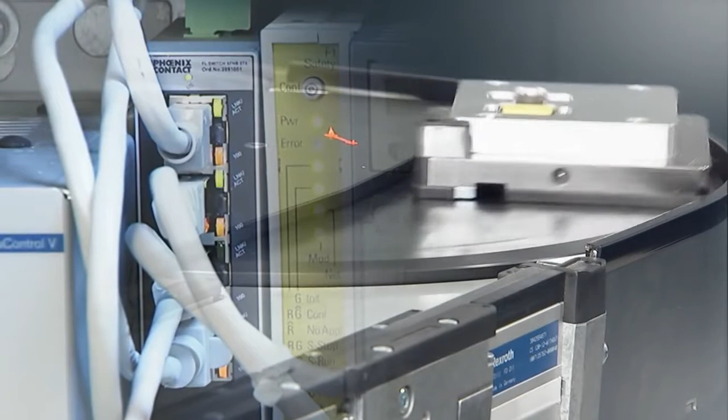But let's start at the beginning. Industry 4.0 stands for a paradigm shift. In this demonstration plant of Bosch Rexroth, the final product controls the machines by which it is produced.

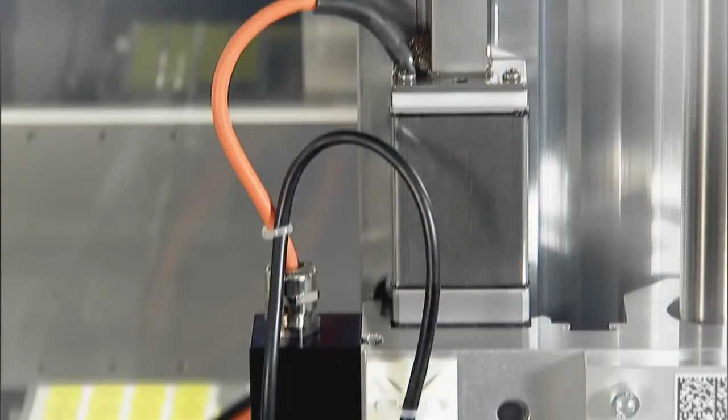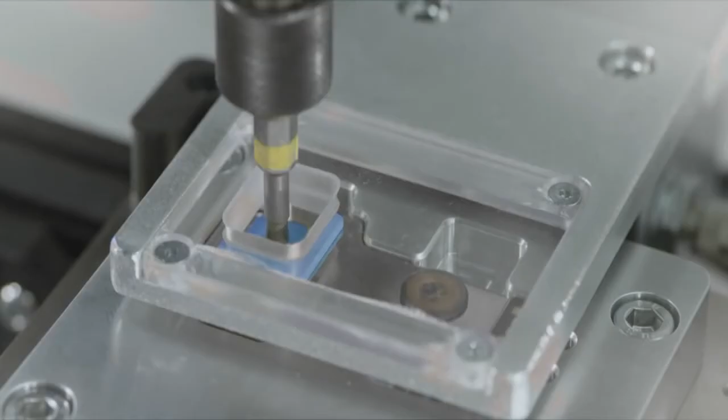The key is tagged with an RFID chip, a kind of radio transmitting label wherein all its properties are stored. It now instructs each machine what to do. That's why our key gets a yellow mark and not a blue one, as for example the key behind it. What looks simple at first glance requires highly complex controls and sensors that significantly affect the entire production.

In the Daimler-Benz plant in Rastatt, the dimension becomes clear. Here, every vehicle body is RFID tagged right from the beginning. Similarly, all details of the vehicle are stored on it, from the wheel hub to the equipment.

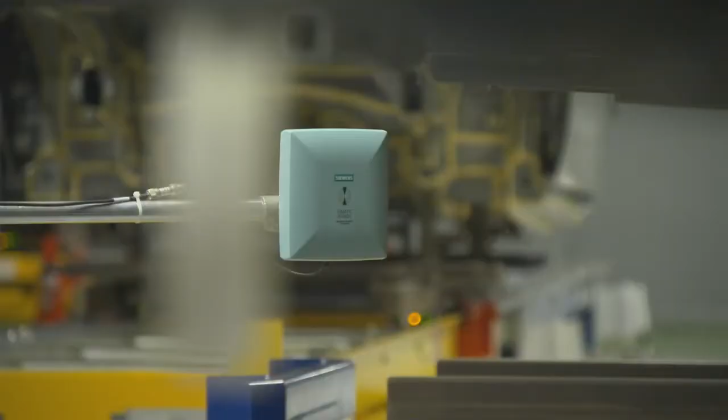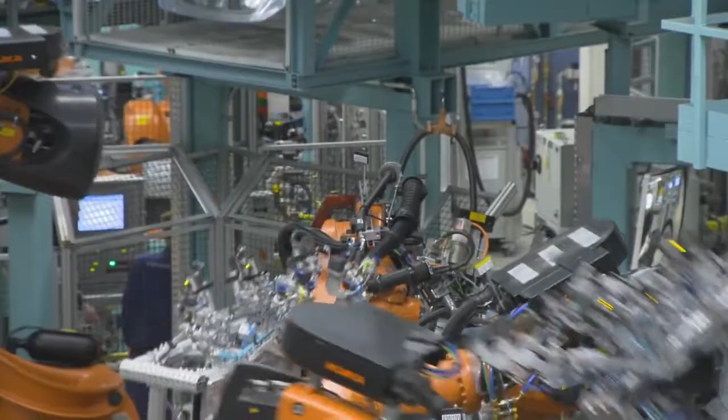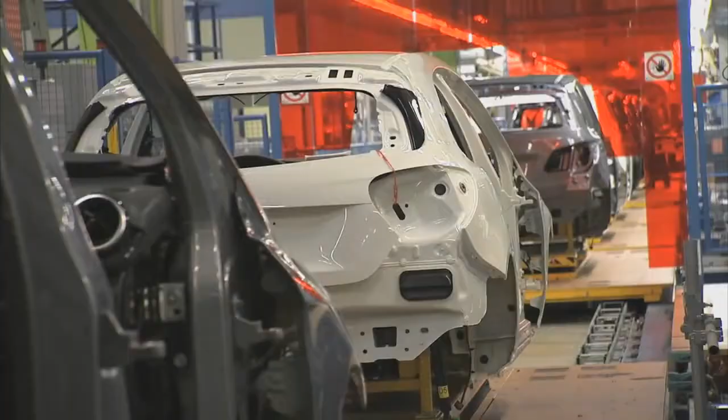Via transponders, the RFID data are queried and new data returned. The RFID tag is almost constantly updated with current information, indicating to what extent the vehicle has already been completed and what is still missing. The insignificant-looking tag has a lasting effect on the complex interaction of the gigantic production structure.

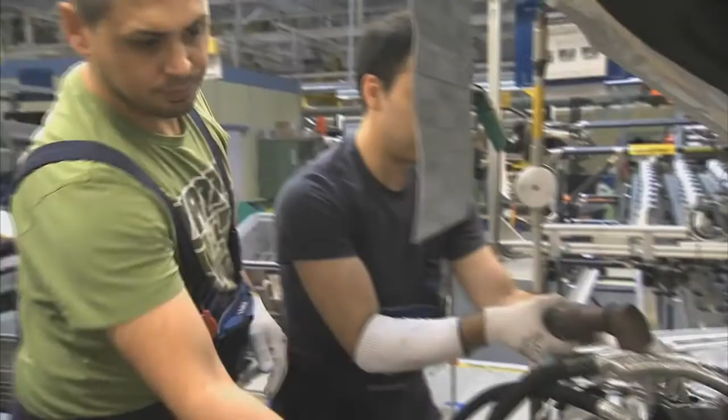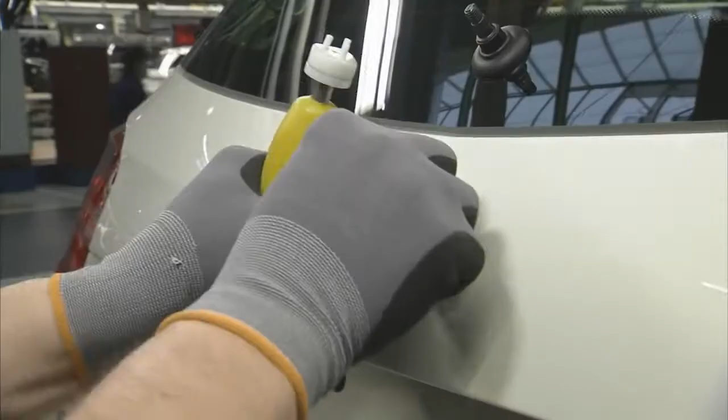It instructs the robot in the broadest sense what to do next. In an environment of 1,500 interacting automation units, where 1,200 vehicles roll off the production line every day, the significance of the information in the RFID tag will clearly be comprehensible. It enables and controls a highly productive process.

But first of all, technical hardware and software solutions had to be found before everything was able to be running smoothly.

The requirement of the customer in the workshop was a wide reader range of up to 1 meter. This is why we applied the UHF technology for the first time. However, the radio waves are greatly reflected in the highly metallic environment, leading to an impairment of the read results. We could solve this problem by developing special algorithms and integrating them into the reader devices.

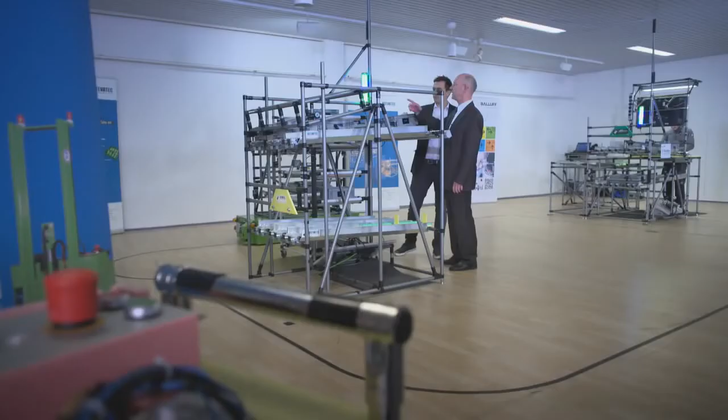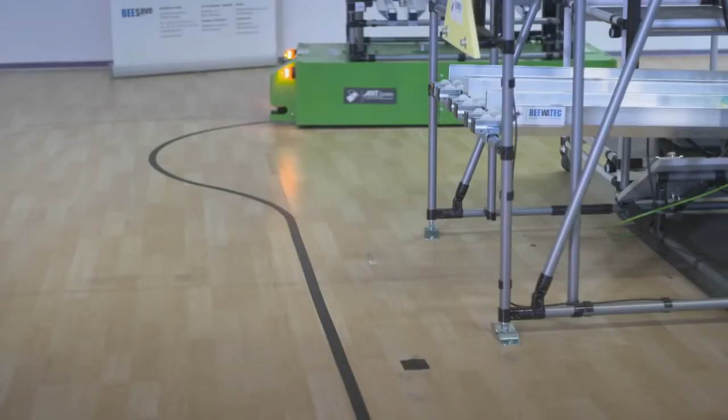But no production can function ideally when the material flow is not absolutely free from error and wrong parts creep in. Fully automatic logistics systems with driverless transport systems equipped with sensor technology provided by Balluff provide the finishing touches here.

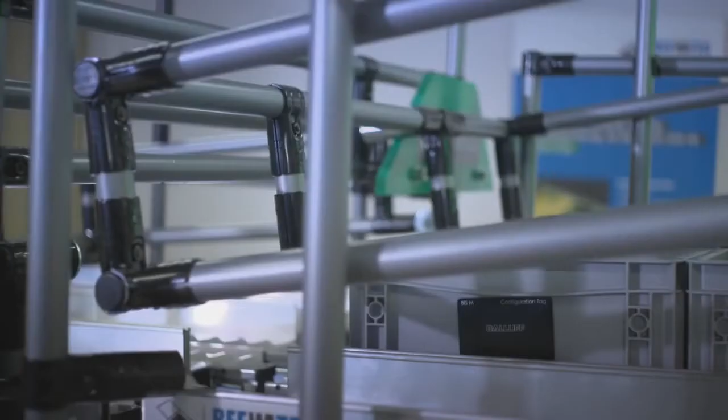The integrated sensors check each box and its contents for accuracy. Again, RFID technology is the basis.

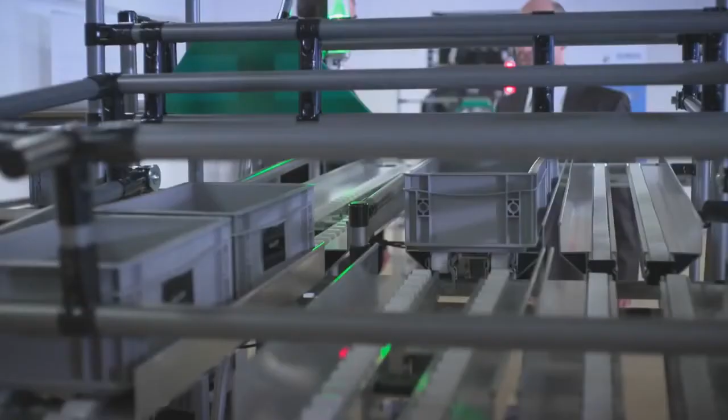In automated production, people and machines are responsible for materials replenishment. As the components sometimes are quite similar, precise control is essential. So only boxes with the right parts or components arrive at the destination, otherwise they will be stopped and a warning signal given.

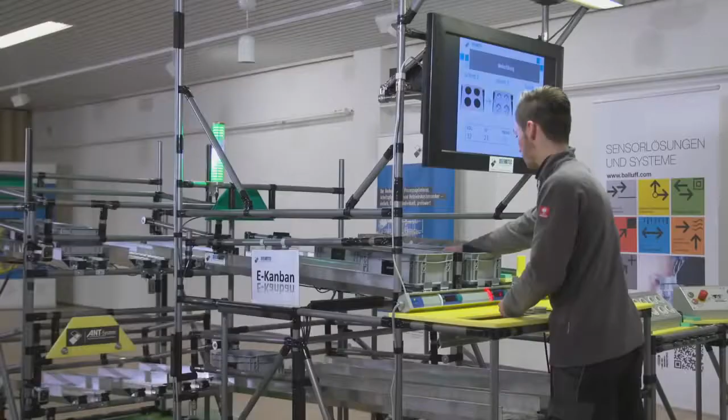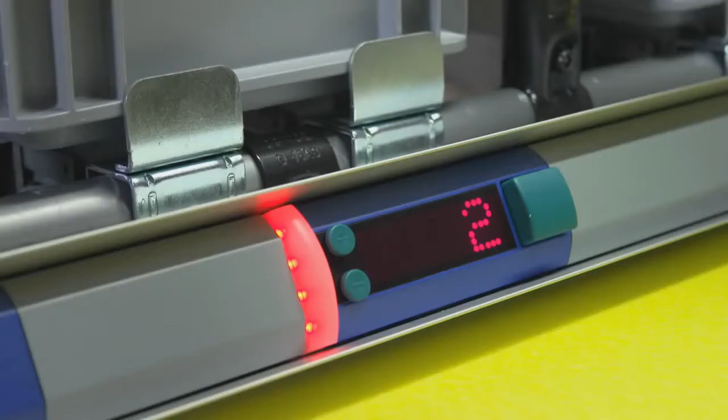It's clear that an incorrectly assembled part in a finished product is a bigger and more expensive problem than ensuring correct assembly during production.

The requirements on sensor technology, especially in the context of Industry 4.0, are that we need much more detailed information from the working environment. We must also be able to track goods, as here in this plant. And we need to combine sensor principles that record, for example, temperature or distances.

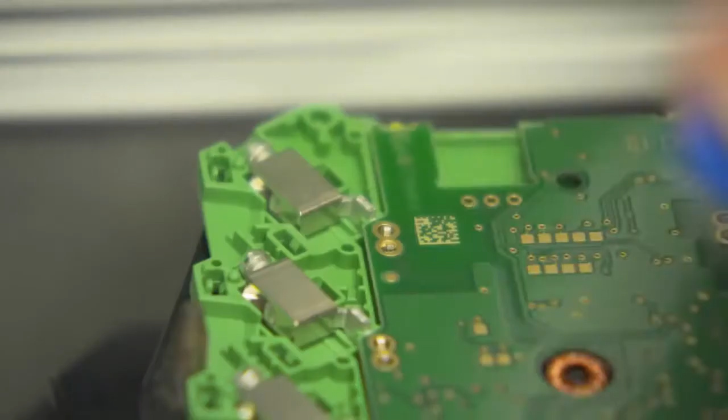At Phoenix Contact, there are RFID chips invisibly integrated that allow a flexible production of one-off items. This ensures that at hybrid working places where humans and machines collaborate, there are always appropriate product-specific instructions.

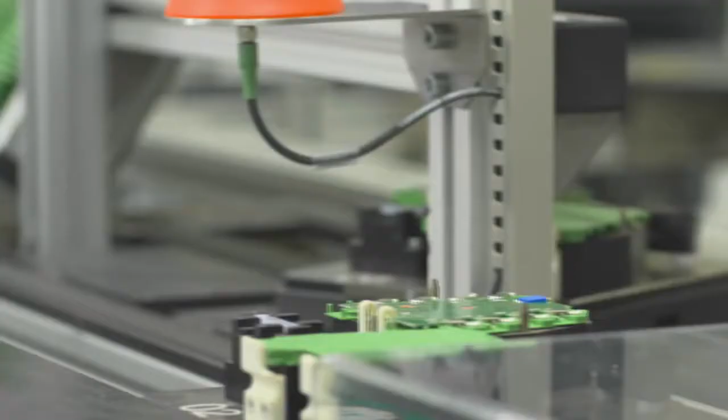Combined with intelligent control systems, complex production systems can easily be set up and configured by on-site operator teams and needn't be programmed. With these technologies, it's possible to control manufacturing processes in a situation-oriented manner and adjust them when necessary.

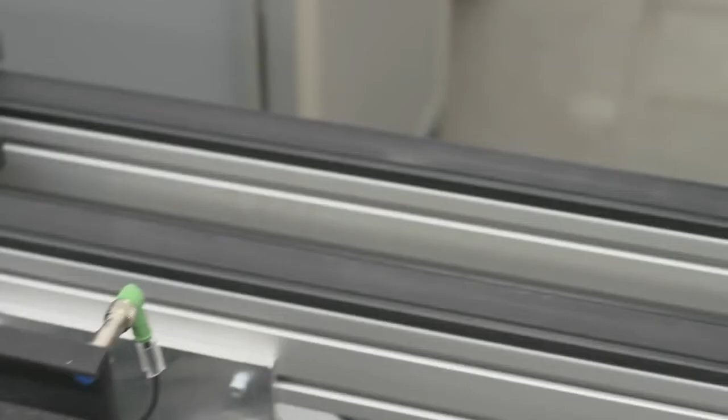The interconnection of the machines in the factory's network allows smooth communication with various IT applications in the company, meaning that production cells, such as labeling processes, can be supplied with the required information in an audit-proof manner at runtime, for example, geometry and process data.

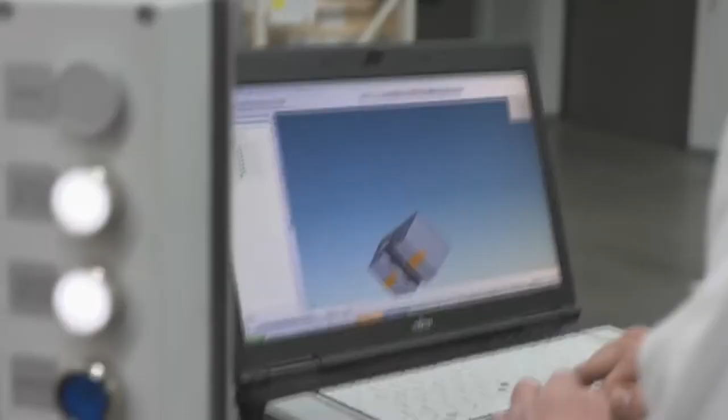This enables the production cells to individually adapt to the next product. Digital product models are used to prepare vision systems and robots during operation for the next task in hand. Industry 4.0 helps to maximize productivity with the maximum flexibility of production without overstressing staff members.

In realizing individual customized mass production, automated production plants have become more complex. The challenge is to enable operators to configure such systems instead of needing experts who program them. It's also essential that the control and IT systems display faults and malfunction information clearly enough for the operator to quickly and efficiently locate and eliminate the cause.

The interaction of hardware, software and communication plays an increasingly important role in the machine and plant construction industry. Technology that functions precisely with programmed intelligence and flawless communication in a production system can be characterized by the term Industry 4.0. In this context, intelligence means that, to a certain extent, machines make decisions, but these are monitored by people who can reverse them at any time. Principally, the final decision maker remains the operator, but secure and stable communications are an absolutely essential precondition.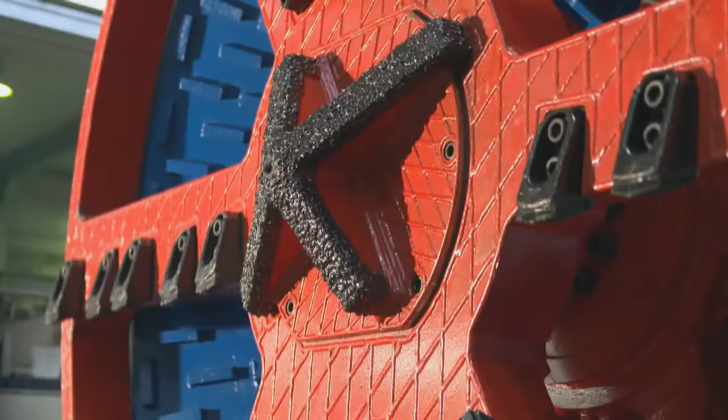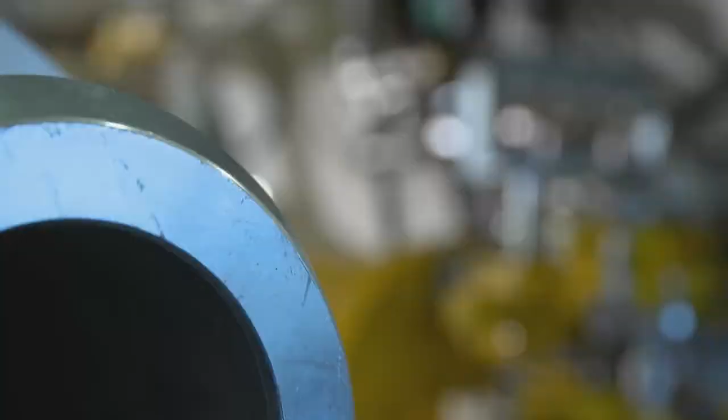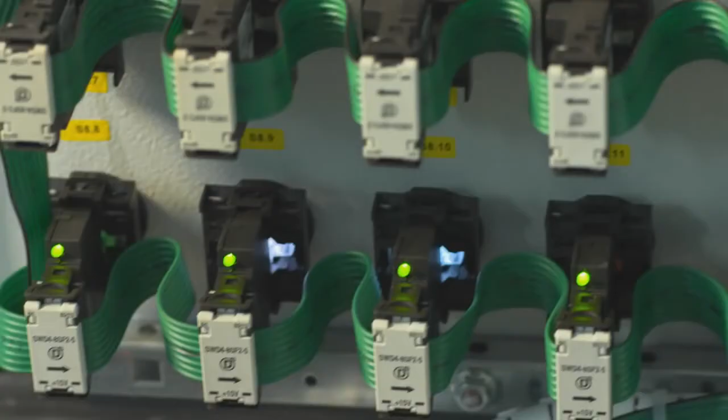For example, this tunnel boring machine from MTS Perforator works underground and independently tunnels through the ground. The design engineers understood that a machine meters under the surface is difficult to maintain. That's why they relied on not only high-quality components, but also on robust and resilient control and communication technology provided by Eaton. These smart devices allow detailed data access to the control elements from anywhere in the world, so that in case of malfunction, remote diagnostics can quickly be made and a remedy found. This ensures a high facility availability for end users. It also makes it possible to protect the machine globally from manipulation and prevent danger to users and equipment.

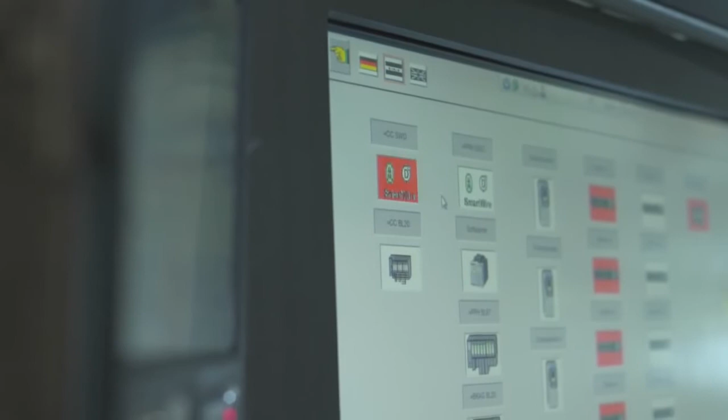That we can log on to this machine from my office workplace here means we have one communication partner here, and on the machine the corresponding communication partner is installed. After starting both programs, I can access this machine over the internet, allowing me to make a diagnosis. I can find out where the defective parts are, which ones have to be replaced. Using this information, service personnel can go directly to the machine with the necessary spare parts, or we can advise the customer on site from here, which may allow them to solve problems directly and find a remedy.

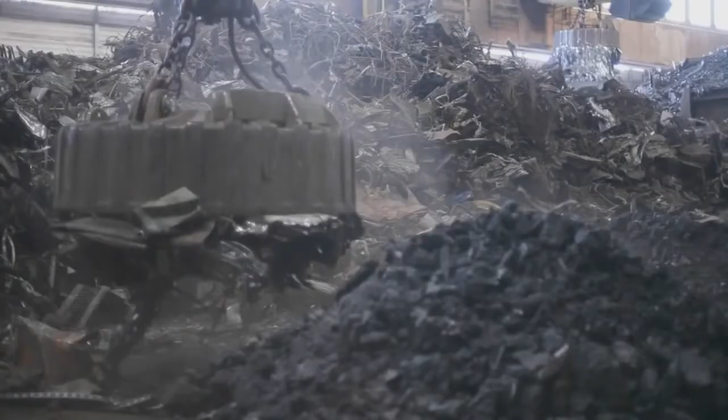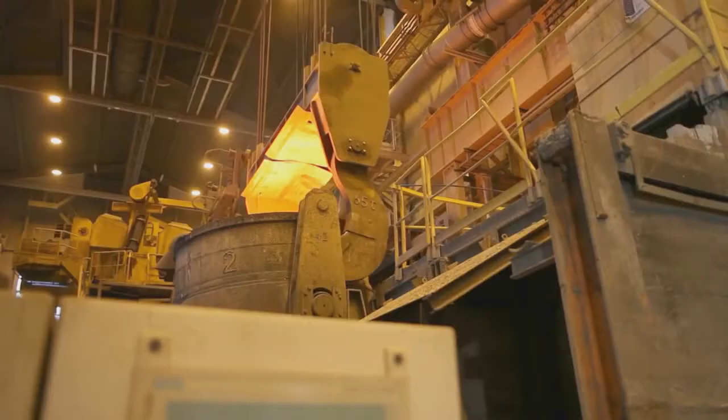In industrial processes, secure data lines are becoming increasingly important. Particularly extreme environments, such as heat, cold, dirt, or other sources of interference, present technical challenges. Corrupt data or an interrupted communication process could have fatal consequences.

The impact a disturbed wireless LAN system could have is evident at the HHLA container terminal Altenwerder in the port of Hamburg. Here, automated guided vehicle systems already control and organize themselves over a wireless network. Heavy containers change their locations independently, as if by magic. They unload and load ships around the clock. Without fail-safe and protected industrial wireless LAN technology, the self-propelled container transporters would be difficult to control.

For industrial wireless LAN, there are always two aspects to consider: the software aspect, which enables the real-time transmission of data packets, such as Profinet, and the hardware aspect, which ensures that the devices can be used outdoors, for example, under very wide temperature ranges, and that the devices are particularly robust, so they can also be used for mobile applications.

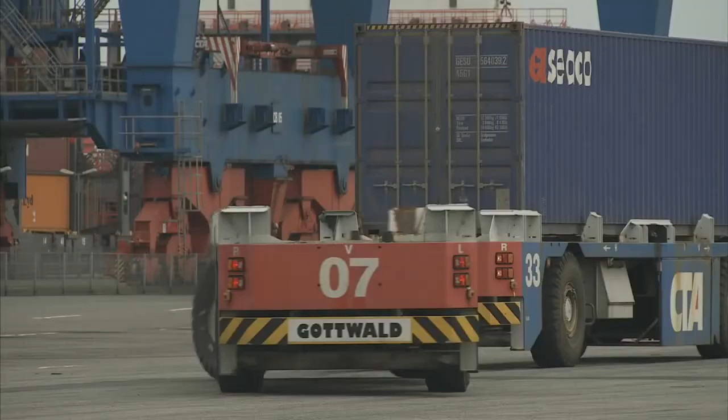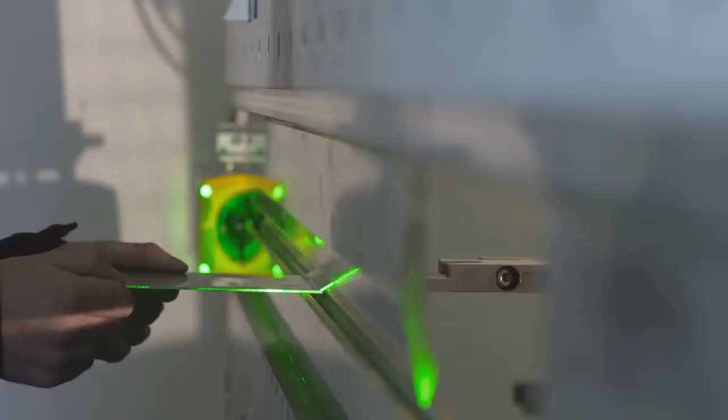Access to the port of Altenwerder is, for good reason, restricted, but the collaboration between human and machine is becoming increasingly important. For example, the folding press stops directly when a hand moves inside the danger zone, governed by a camera system using lasers and software image analysis.

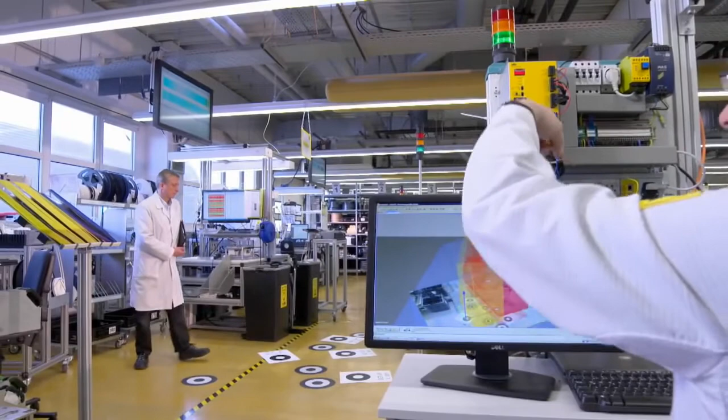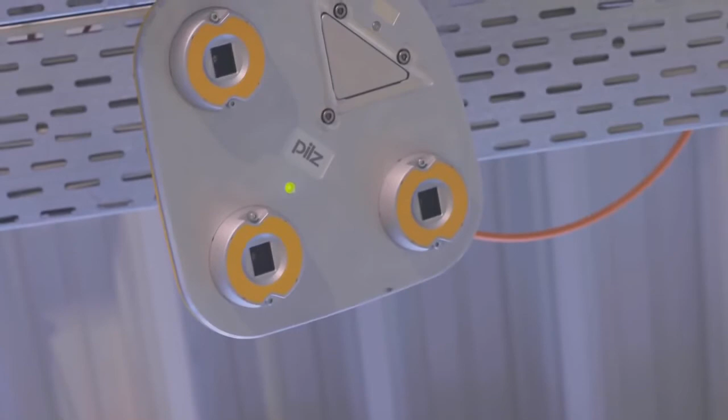In more complex facilities too, people need to be protected. With its 3 cameras, the SafetyEYE system from Pilz monitors in 3 dimensions. Thanks to intelligent software, an operator can easily determine shelters around the machines and facilities. When the operator enters the defined safety zone, according to the programming, the facility will be stopped immediately. Restarting the machine can only happen after the operator has left the safety zone and confirmed his departure.

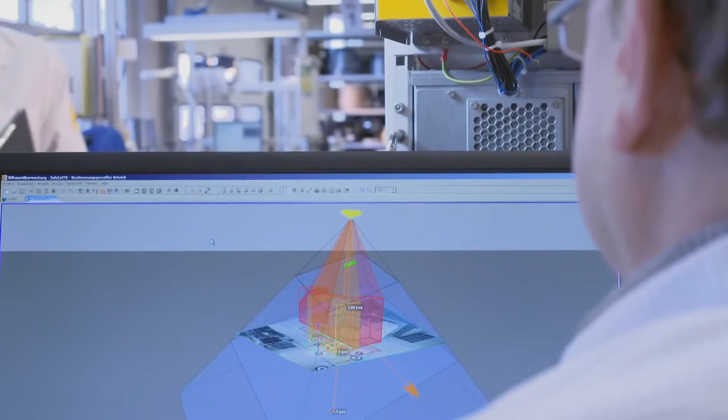In combination with controls, intelligent sensor technology allows new degrees of freedom for the implementation of dynamic processes, allowing working areas to be created where humans and robots can interact optimally, and the safety of the operator remains guaranteed at all times.

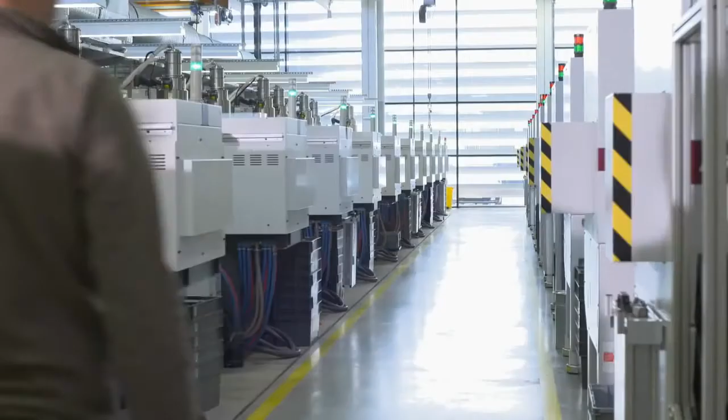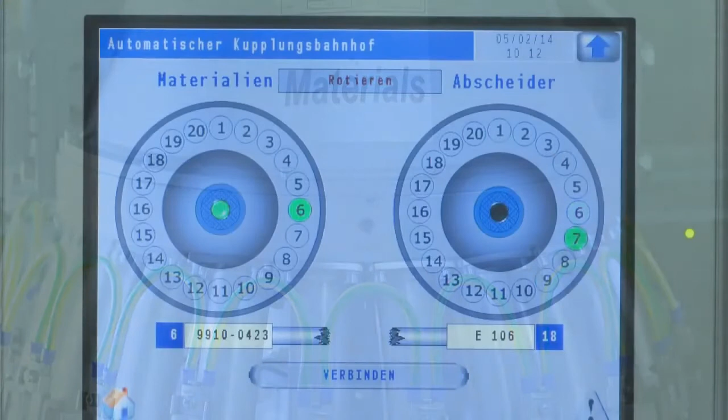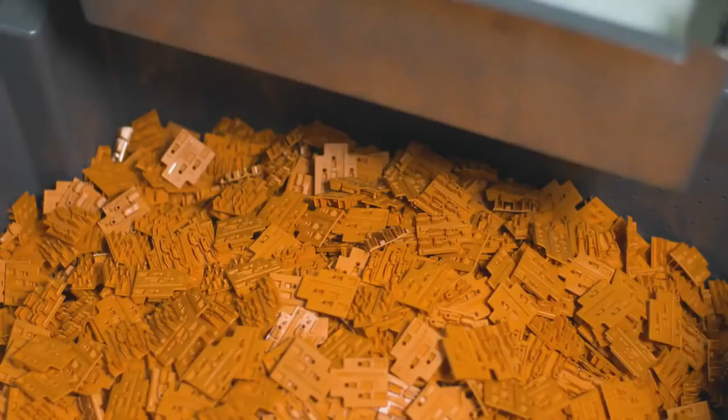The WAGO company operates several state-of-the-art injection molding plants at various national and international locations. Billions of plastic parts are produced here annually. Worldwide, all production sites and all production machines are interconnected. Authorized employees of the company are able at any time to globally query information about all the products, their production output, or about machines of any type and production method in real time. For example, the current order status of each machine and respective quality grade, and the level of efficiency.

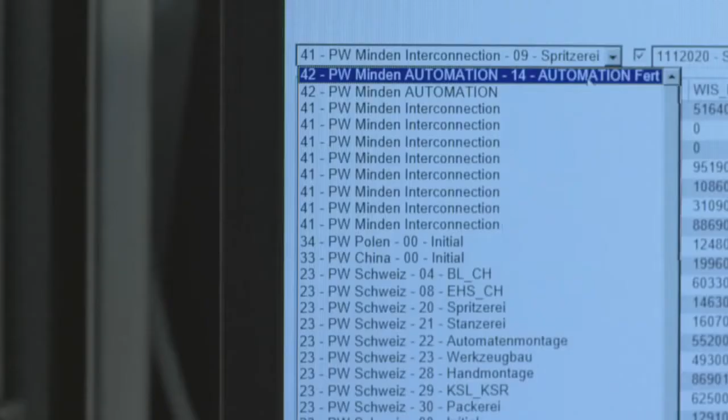Worldwide interconnected IT systems, and in particular the integration of production systems, involves a significant increase in productivity as well as special dangers, for example, virus attacks. Measures for protecting the system, summarized by the term security, are a continuous task. The effort required is often significantly underestimated.

The particular challenge for us as a company is not only to analyze our processes, but also to ensure that our processes can only be influenced by well-qualified personnel. We achieve this by securing our entire machinery and equipment with RFID technology, and don't use password levels anymore. Passwords can be learnt by anyone. RFID transponders are only worn once by each employee.

Software, hardware and communication are the triad of Industry 4.0. The entire production chain is controlled and documented, with the highest quality and productivity. But when will Industry 4.0 be broadly implemented in manufacturing industry? In my opinion, Industry 4.0 will become reality when the meaning and purpose of Industry 4.0 is no longer discussed, but it becomes a matter of course for flexible collaboration between ultra-modern factories and value-added networks, using the latest information and automation technologies. Perhaps then we will realize in retrospect that a revolution has taken place.